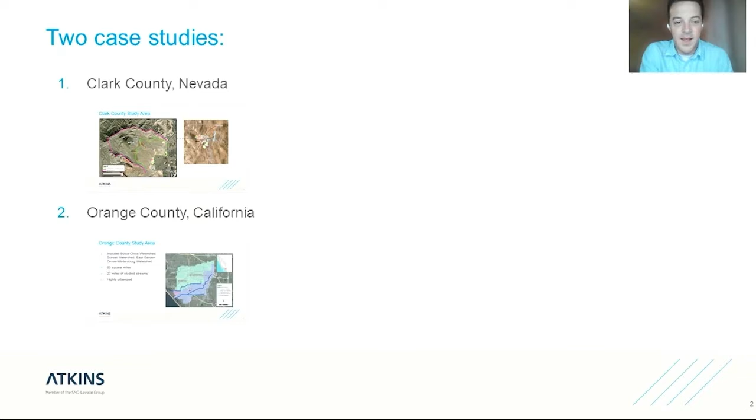Hello, my name is Clark Barlow. I'm a senior engineer with Atkins, and I'm excited to be here presenting at the virtual ASFPM conference. I'm here to talk about adapting 1D hydrologic methods for 2D model applications. And I'll be discussing this topic in the context of two case studies, one in Clark County, Nevada, and the other in Orange County, California. So starting with the Clark County, Nevada case study.

Clark County, Nevada, if you're not familiar with Clark County, is in southern Nevada. It's where Las Vegas is located. And the study area for this case study is on the west side of the valley. It's actually within the city of Las Vegas. It's an area that's growing quite a bit. It's in Summerlin, and this particular development is referred to as Summerlin West. It's a 7.2 square mile development denoted here by the green boundary. And the entire watershed area that encompasses and impacts this development boundary is 21 square miles.

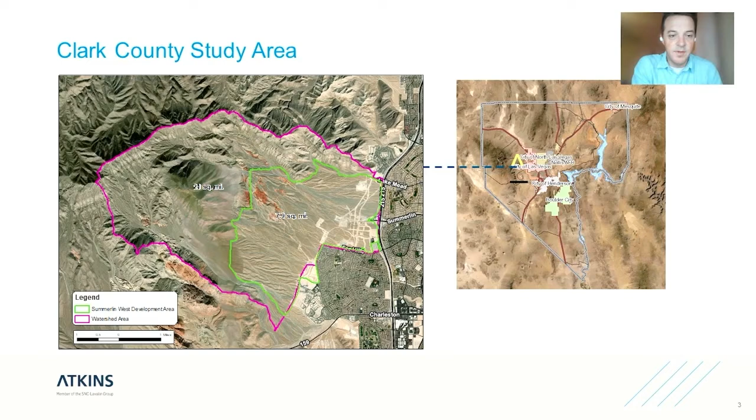The watershed is characterized by steep terrain. It's very alluvial, and it's very picturesque. And so there's a lot of interest and desire to develop this area. However, there's no flood control and no flood protection at the moment. And so that was the impetus for this study, to better understand the complex flow patterns in this area.

Specifically, we wanted to establish the 100-year existing condition flow rates and velocities so that as proposed flood control designs were developed, they could be compared against the existing condition flow rates and velocities to make sure there were no adverse impacts in comparison to what was there previously.

Our approach to analyze this problem was to use HEC-RAS 2D as the modeling engine. We used variable cell sizes ranging from 20-foot cell sizes where we needed a lot of detail up to 100-foot cell sizes where not as much detail was needed. We used a rain on grid approach. And what that allowed us to do is let the model figure out where the drainage paths should go. If you look at the blue flow patterns, you can see that flow sometimes splits and then comes back together. And so we felt like it would be better to let the model figure that out instead of us trying to delineate manually where the basin boundaries should be.

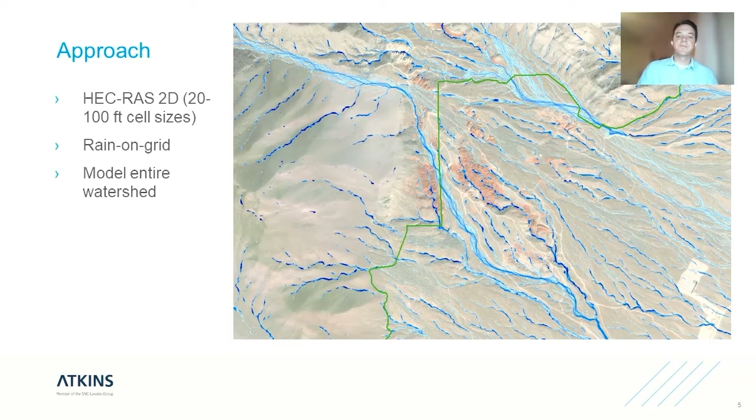As we started this process, we encountered several challenges, particularly as we tried to follow the drainage design manual within Clark County in the context of these more advanced two-dimensional models. And there were three areas that we ran into challenges and came up with what we felt like were good solutions. The first is in regards to the rainfall depths.

As you can see, the blue lines are isohyetal lines, which are areas of uniform rainfall depths. On the east side, you see depths of 3.4 inches, and on the west side, you see depths of approximately 4 inches. Not a huge range, obviously, but when you get about 4 inches of rain over the entire year, that 0.6 inches can make a big difference. And so we wanted to have some way to be able to capture that variation in rainfall.

Infiltration was another consideration, particularly as we were looking at doing the rain on grid approach. HEC-RAS, at least the version we were using, didn't have the ability to model infiltration. And so we had to come up with a way to quantify that. And then depth area reduction factors, which is a way to adjust rainfall depths based on the upstream area, was something we had to consider, something that's done commonly within Clark County, but is a hard concept to apply when trying to fit that within a 2D model framework.

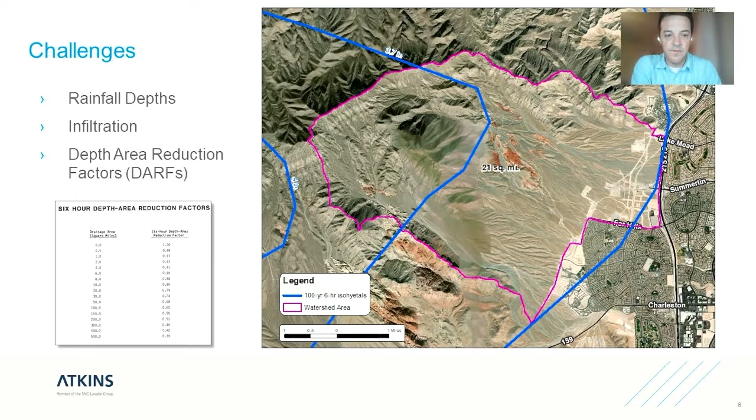So first, looking at the rainfall depths, the limitation we ran into is that HEC-RAS only lets you specify one rainfall depth for each 2D area, and so the only way that we could introduce a varied rainfall depth was to break up the domain into multiple 2D areas. And so you can see we broke it up into 4 different sub areas. And then within each of those 4 2D domains, we were able to specify a different rainfall value.

And so it gave us a little bit more control over how much rainfall to put in different parts of the watershed. So for instance, in the area that was 1.7 square miles, the rainfall depth was closer to the 3.4 inches. Whereas in the area that was 5.9 square miles over on the west side, the rainfall depth was closer to the 3.7 and 4 inch range.

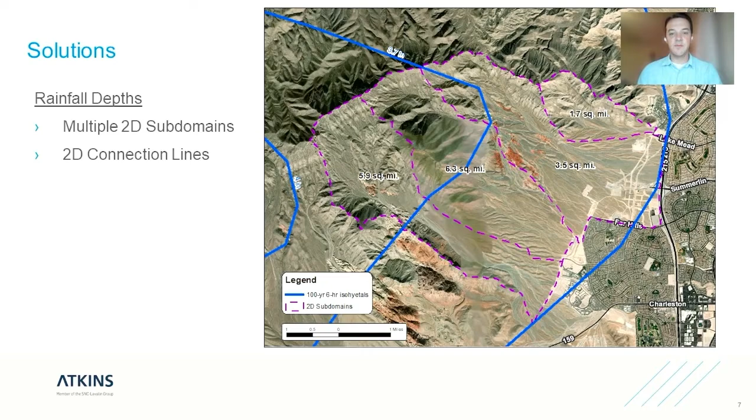And so then we were able to connect those 2D areas using 2D connection lines, which basically act as weirs that follow just the ground profile. And then that would control the exchange of flow between the 2D areas. And so we were quite pleased with that approach, and it seemed to work very well.

As far as infiltration, again, as I mentioned, HEC-RAS, at least in the version we were using, didn't have the ability to model infiltration. However, that's an important part of the hydrologic analysis. And so what we elected to do was use HEC-HMS to compute the rainfall losses.

And then we took the rainfall excess amounts from HEC-HMS and used those values as the direct rainfall input into the HEC-RAS model. And so we were happy with that approach. It gave us a level of comfort that we were accounting for losses, and then applying the rainfall excess as an adjusted sort of rainfall depth that had already accounted for the infiltration.

The depth area reduction factors was another challenge, and essentially depth area reduction factors allow you to look at the total upstream area and then use an adjustment factor to reduce the rainfall, to account for the fact that the storm isn't going to fall uniformly over the entire large watershed. And then as you look at smaller watersheds, the impact of that adjustment becomes less and less. That was a difficult concept to think about and apply in a 2D model.

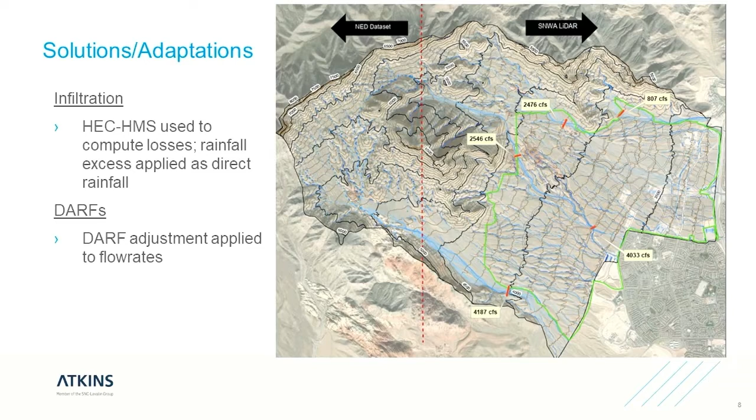And the reason for that is because at any given point within the model, you're going to have a different upstream area. And so, take the point there at the top right where it shows 807 CFS. What we would do then is inspect the upstream area at that point, figure out what the corresponding DARF value is, and then apply that DARF adjustment on the flow rate.

And so we were pleased with that approach. And in fact, as we compared the results of this modeling effort with a 1D model that covered at least a portion of this watershed, we found that the results were actually quite comparable within the 10, 15, 20% range. Now, a lot of that variation is because of the fact that 2D models are inherently different than 1D lumped parameter models, and so you would expect that kind of difference anyway. And so the fact that we were able to make some simplifying assumptions and still be within a reasonable range gave us some good confidence in the approach we used.

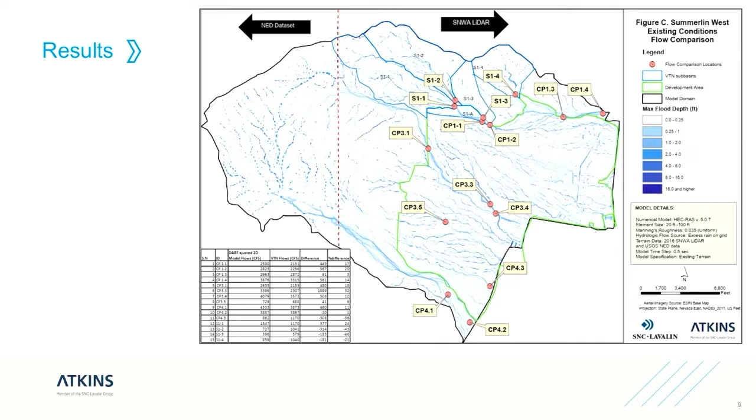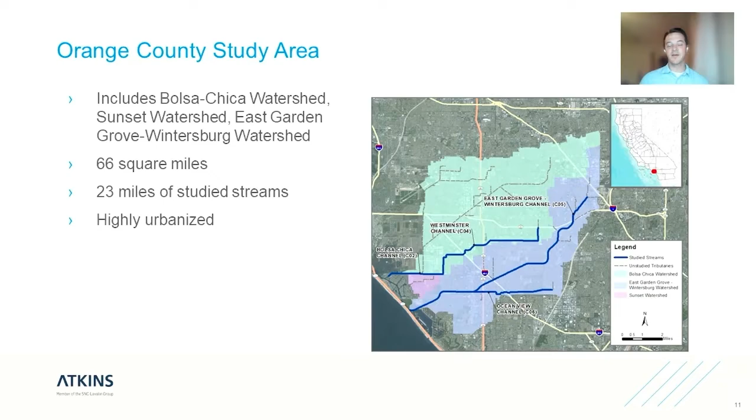The total watershed area is 66 square miles, and it includes 23 miles of studied streams. It's a very urban area, highly urbanized, very different from the watershed that we just looked at in Clark County. And so it came with a lot of its own challenges. In fact, it probably deserves its own presentation and probably will at some point.

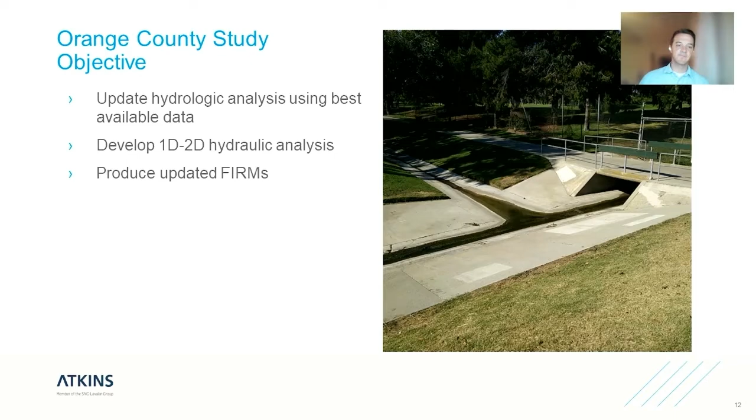The objective of the study was to carry out an updated hydrologic analysis using the best available data, and then to develop a 1D/2D hydraulic analysis that used the hydrograph output from the hydrologic analysis as input into the hydraulic analysis. And then the floodplains that were generated from the hydraulic analysis would then be used to produce updated flood maps for insurance purposes. And that's still an ongoing effort.

The hydraulic model was built using HEC-RAS. It was a combined 1D/2D unsteady model. The 1D domain was connected to the 2D domain by using lateral weirs, and the 2D domain was comprised of 50-foot cells, which still resulted in a fairly large and sizable model. The inflow hydrographs were applied in the 1D domain using the inflow hydrographs from the hydrologic analysis, which for this study followed the Orange County unit hydrograph method that's prescribed in the Orange County Hydrology Manual from 1986.

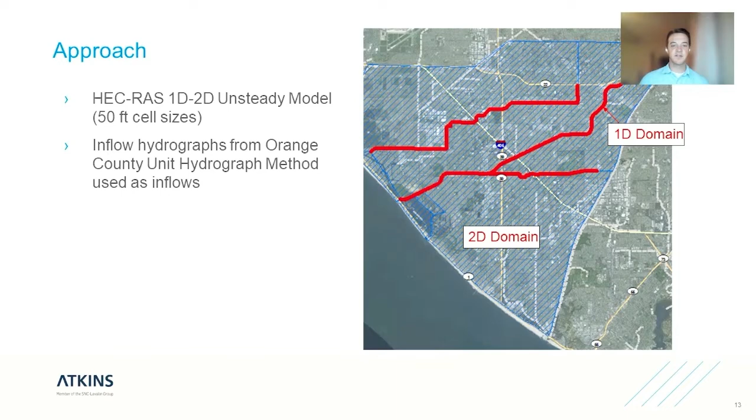And so the fact that we were using the hydrologic methods from 1986 to try to apply that to this complex 1D/2D unsteady model became quite challenging. And there were two areas I want to point out where we ran into some specific challenges. The first was, again, in the application of the depth area reduction factors, and the second was in the application of the lag time and time of concentration calculations, which are fairly unique within Orange County. So first, the DARFs.

DARF values are typically applied, like we talked about, for a single catchment area based on that drainage area. So you look at the drainage area and figure out which DARF value corresponds to that. Now the Orange County Manual states that that catchment area is the total drainage area contributing runoff to the point of concentration where the design discharge is to be calculated. Now that became quite challenging to apply in our case because there wasn't just one design discharge that we were interested in, but we were interested in multiple discharges as you move downstream in the channel.

And so if you used one depth area reduction factor for one concentration point, when you move down to the next concentration point, you may have enough area now at that point where you should be in a different DARF. However, you had a concentration point upstream that you needed a different DARF for. And so in order to apply that criteria strictly, we really would have needed separate models for each DARF that corresponded to the upstream area of each concentration point.

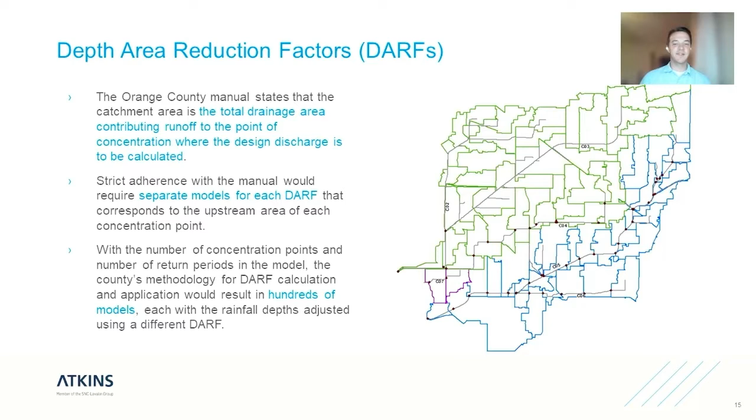And that the prospect of doing that was just crazy, to be frank. And so we brought that up with Orange County and came up with a simplified method that was more practical for the purpose of our study. And so that simplification is outlined here.

Essentially, the upstream area for each concentration point was evaluated, and a corresponding DARF value was then applied to the rainfall values, not for that entire watershed, but for additional sub areas that came in between that concentration point and the next upstream concentration point. Now, although that resulted in an over prediction of flow rates at the concentration point, the hydrographs from individual subbasins coming in were more accurate.

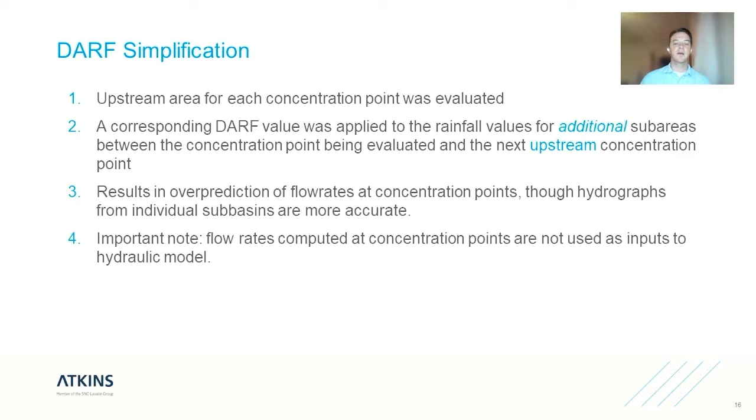And really, it was the hydrographs from those individual subbasins that we cared about the most, because it was those hydrographs that were going to be used as inputs into the hydraulic model. We weren't interested in using the hydrographs at the concentration points because the 2D model already has flow coming into it from upstream areas. Now, like I said, the flow rates computed at concentration points weren't used as inputs into the hydraulic model, so it wasn't as important that those concentration point flow rates may be a little bit overestimated.

Now, as far as the lag time and time of concentration goes, the Orange County Hydrology Manual, again, from 1986, actually requires a separate rational method analysis be completed to develop time of concentrations for unit hydrograph studies. In other words, if you have a single watershed that you're running within HEC-1, you need a separate parallel model of that same watershed using the rational method to come up with the time of concentration that you can then transfer into that unit hydrograph or that HEC-1 model.

Now, for one watershed, that's not such a big deal. But when you're looking at 50, 60, 70 sub-watersheds, and now 50, 60, 70 separate rational method models, then it becomes a big deal. Specific instructions for how to do this weren't really written into the manual just because that application wasn't very common back when the manual was written. So we sort of had to think about this and come up with an approach that we felt would be appropriate.

Now, if you think about the rational method analysis, at least in the Orange County manual, it requires a couple of things. It requires the delineation of an initial sub area, which is really small because that initial time of concentration is so slow. That time is very critical to the overall time of concentration in the watershed. And then each subsequent sub area size is supposed to be no greater than 4 times the area of that smallest sub area. So now you're not only looking at a parallel rational method model, but potentially one that's subdivided over and over and over again, to comply with that criteria.

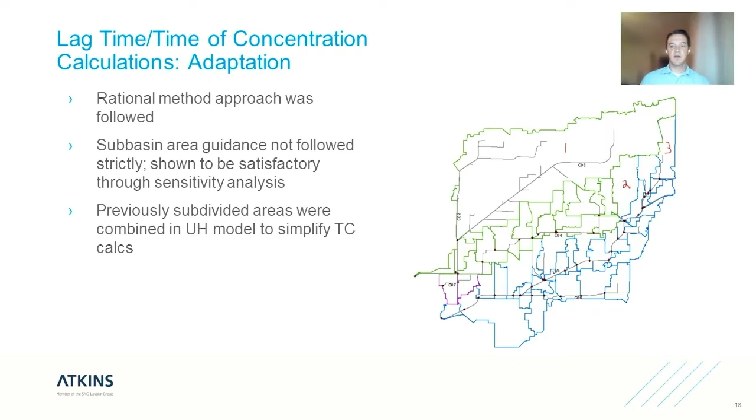In fact, if you look at the results from the study in comparison to a previous study done, as well as the FEMA effective flow rates, even when comparing the concentration points, which we felt were over predicted, we were still very close to those previous studies.

A couple of lessons we learned through this process are that many hydrologic criteria manuals, particularly ones that haven't been updated in some time, just are not well suited for unsteady hydraulic model applications, let alone 2D modeling. Just the unsteady concept is something that requires some adaptations of that criteria to be able to use it.

Another lesson we learned is that there really is a need, I think, to standardize some of these inputs: rainfall, DARFs, how to handle infiltration, time of concentrations, and lag time for these 2D unsteady applications. And that's only going to become more important as 2D models become more widely used and accepted.

And then a third lesson we learned is that it's just key and extremely critical to have an upfront discussion with the project team, both the consultant and the client, regarding the modeling approach and what simplifying assumptions are going to be used, just so that everybody's on the same page and you have buy-in from the very beginning. And that requires both an understanding of the 2D models and how they work, as well as an understanding of the criteria that's being applied.

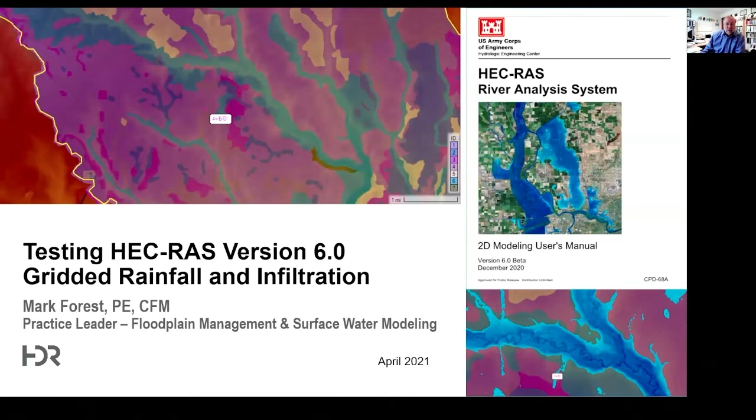Today I'm going to talk about testing the beta version of HEC-RAS 6.0 for the gridded rainfall and infiltration functions on 2 watersheds in the Houston area in response to Hurricane Harvey. First of all, it's important to put in context how these new features differ from what's in RAS currently. You can do rainfall runoff modeling in RAS 5.07, but you're limited to the assumption of a homogeneous rainfall excess over your entire domain, requiring that you break up your model into multiple interconnected domains in order to treat any kind of non-homogeneity. So it's a bit awkward to do the level of sophistication you can do in the new version.

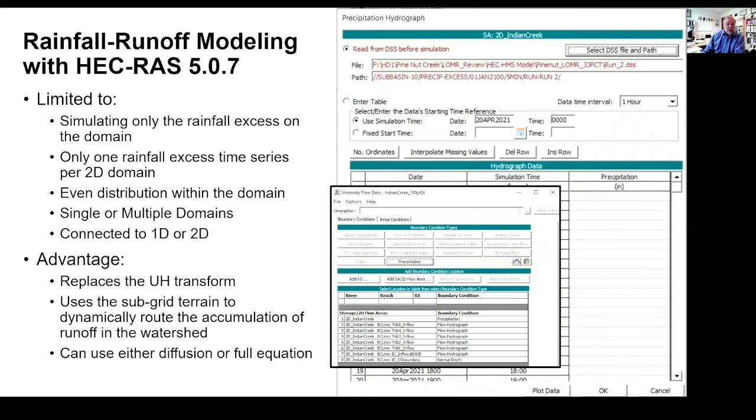What the rainfall runoff simulation in RAS does is replace the unit hydrograph transformation, which assumes a much more lumped parameter approach to determining how the runoff accumulates within your watershed to the point of interest. The simulation can be done with either the diffusion or the full momentum solution. 5.07 validates quite well against HMS. This has been tested by HEC. We tested it on a number of watersheds.

One example is this one from Rincon, New Mexico, where this watershed was simulated using HMS originally. The rainfall excess from HMS was applied to a 2-dimensional grid within RAS to see how well it would replicate what HMS produced. And so the volume is going to be identical, as you can see in the comparison hydrographs, because it's using the same rainfall excess. So by definition, it's the same volume of runoff.

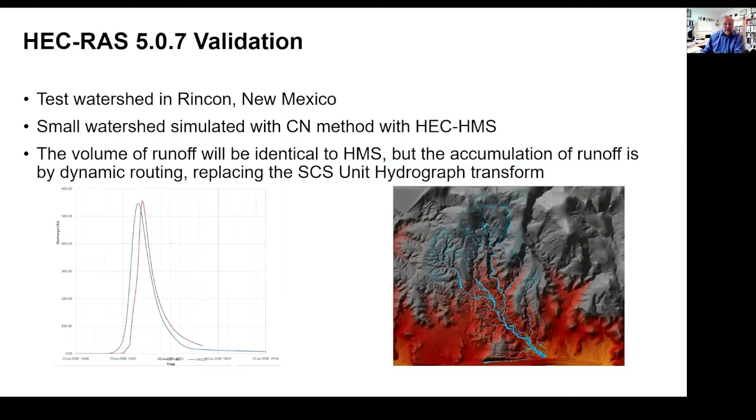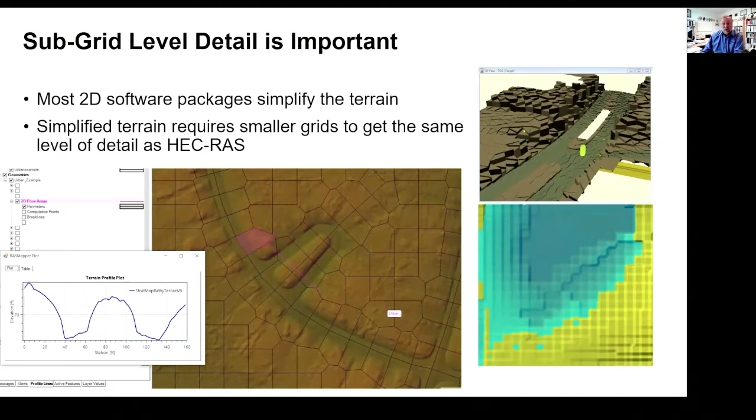The difference being the replacement of the transform with a very dynamic simulation of the rainfall from all portions of the watershed accumulating in the main channel to the point of interest. The peak was very similar, and the time of peak was only slightly offset, so they compared very well to one another. And it's able to do that because RAS sees that subgrid level of detail, whereas most 2D models simplify the terrain as a single elevation for each grid element, represented as a triangle or a rectangle or a square, as opposed to being able to see the subgrid terrain detail that RAS does.

So if you imagine that this is a grid cell within your model, RAS cuts a cross section at each cell face. You can see that when flow enters at this cell face, it only has an opportunity to leave this cell face at very low flows. It has to get deep enough to interface with the two sides before there's going to be interaction between this cell and the adjoining cells on either side. So that allows it to see a preferential flow path through your domain. That's really important to doing rainfall runoff modeling and being able to capture those unique hydrodynamics of how flow is propagating through the watershed.

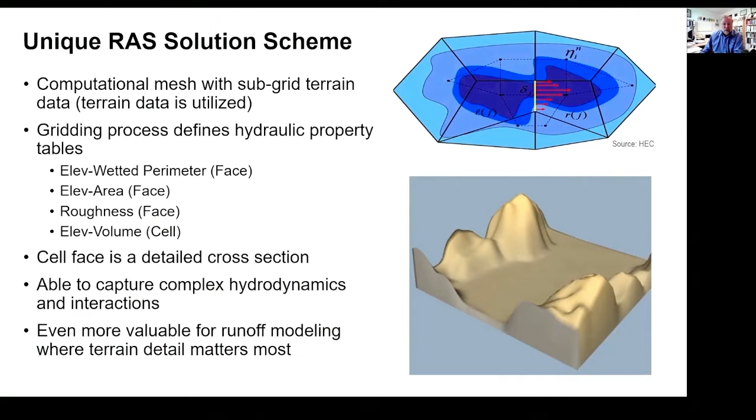So beta 3 of version 6 of RAS adds a couple of new features that are really key to this process. One is gridded rainfall. Being able to identify the time series rainfall that's occurring at every grid cell within your watershed allows you to simulate the behavior of a storm that's moving across your watershed or down your watershed, which would obviously change where that rainfall excess is occurring and then how it ultimately propagates through your watershed.

The other is spatially variable infiltration. So with that rainfall that's occurring here, it's falling on different types of surfaces that have different runoff characteristics. Being able to capture that at the locally specific level combines that locally specific rainfall to a very locally specific runoff computation, and then allowing that two-dimensional solution to then accumulate that runoff within your watershed to your point of interest.

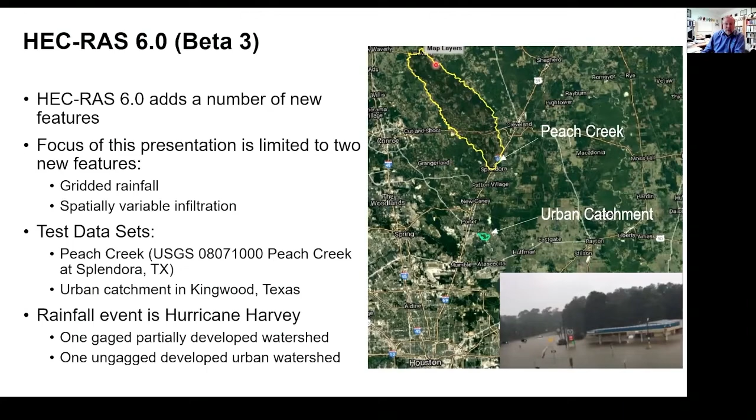So our two test data sets that we applied to this test, it's a limited test of some of the features. One is a gauged watershed, which is Peach Creek at Splendora, which is this one. And the other is an urban catchment that's fully urbanized and ungauged. Hurricane Harvey produced very substantial amounts of rainfall over the Houston area. In our larger watershed in Peach Creek, 22 inches approximately during the course of that event, as compared to almost 28 inches in our urban catchment.

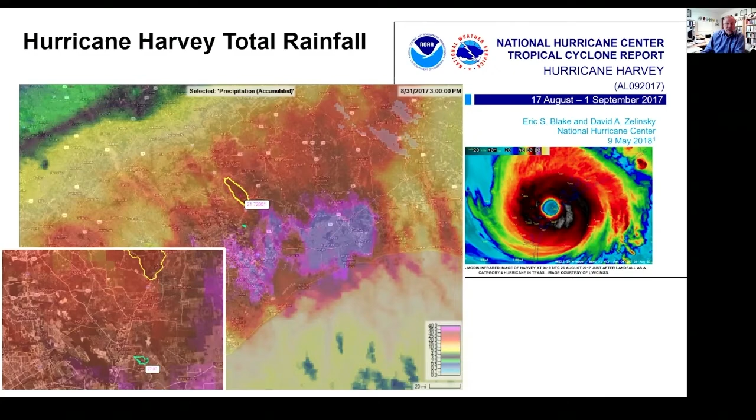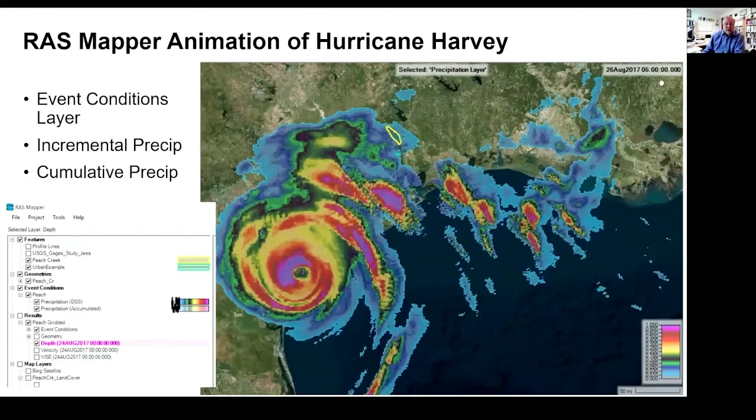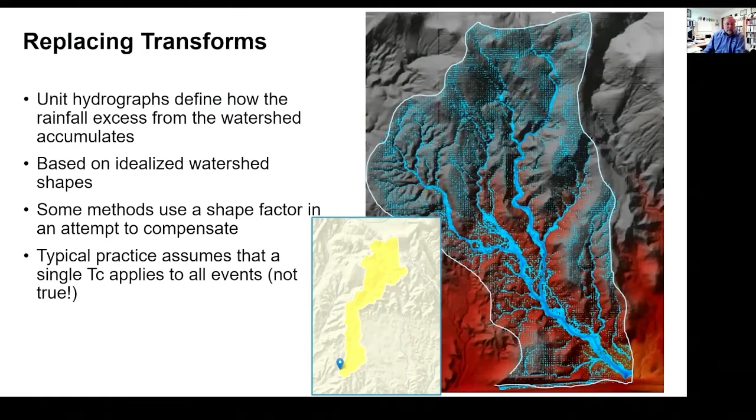A lot of times also people assume that the same time of concentration will apply to all the events that they're going to simulate within that watershed, a 10-year event and a 100-year event having the same time of concentration. But that's not true, because a very frequent event is going to produce lower depths and velocities within these channels, and therefore a longer time of concentration than an extreme event that produces greater depths, greater velocities, and shorter times of concentration. So by simulating it dynamically, you'll automatically account for those differences from rainfall event to rainfall event, as opposed to having to modify your time of concentration.

Runoff accumulation is going to be much better defined, obviously, with an overland flow model, since it's able to capture a lot of those very unique watershed conditions that exist. The surface for overland flow is going to vary depending on the characteristics of that surface, where the defined channels are and what their conditions and roughness are, the storage that's taking place within the watershed, and whether flow is behind impoundments or roadway embankments, which will affect how flow propagates through the system. And if you've got conveyance systems within your watershed, that may also influence how water accumulates and propagates.

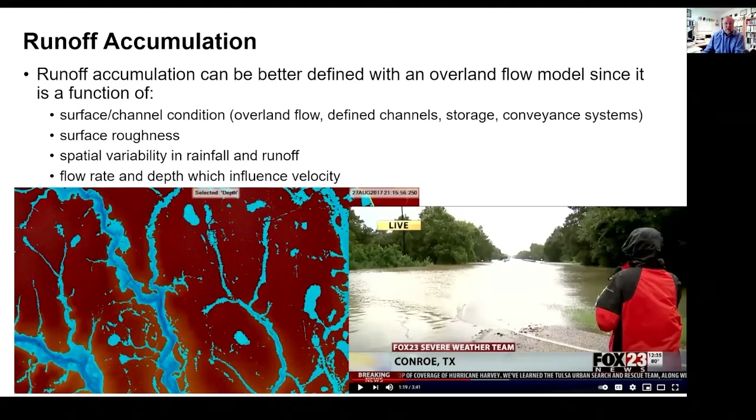The roughness of those surfaces is obviously key, and the spatial variability of that roughness, as well as the rainfall and runoff, all influence the velocity that leads to the time of travel to your point of interest. Rain on grid considerations include properly characterizing the surfaces you're dealing with, as well as the complex factors that affect the rainfall losses that get you to an excess. For example, interception by the plant canopy is uniquely different when you have sagebrush or turf or very dense trees. They all have their own unique interception characteristics, depression storage, surface wetting and infiltration that's spatially variable with soil type and soil profile.

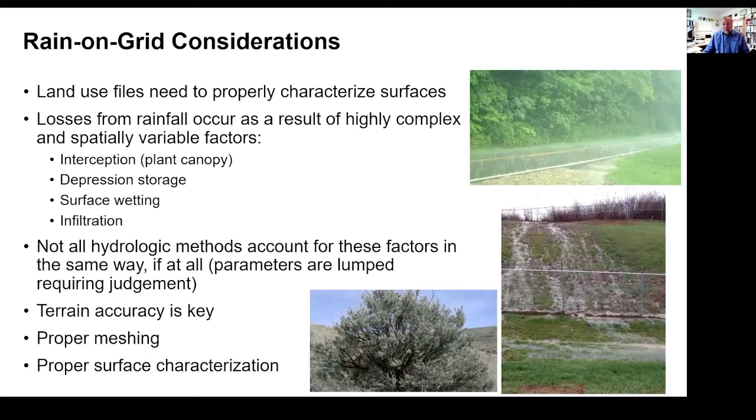Not all hydrologic methods can account for all these factors in the same way, if at all. And oftentimes the parameters are lumped, which requires you to exercise some judgment about how you pick the range of possible parameters without the ability to separate out these various factors by themselves. Terrain accuracy is obviously very key. Proper meshing and characterization of your surface is going to be key. So of the potential sources of error when you're doing this type of simulation, the rainfall is going to be one of your biggest, and usually is in a hydrologic model.

When you don't fit the observed data, you should look at the rainfall first, because it's usually your culprit, your largest culprit. Make sure that rainfall also has been adjusted to your local time, because NOAA publishes their data for Greenwich Mean Time. So when you're comparing to observed data, that adjustment has to have been made first, or you're going to mismatch depending on where you are.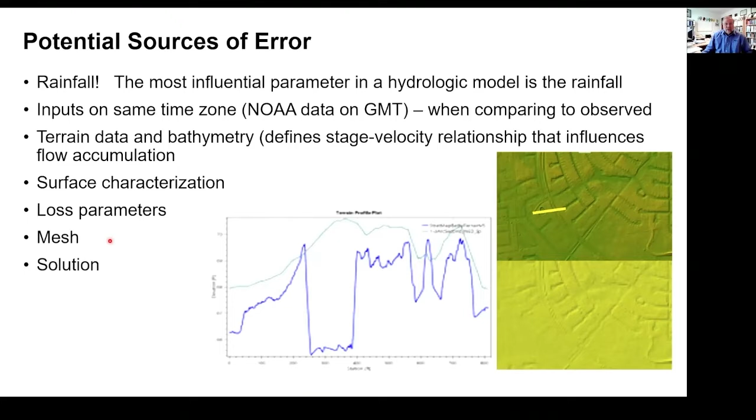The terrain data and bathymetry really defines that stage velocity relationship that influences flow accumulation. So if your surface is not properly represented in the terrain data, you're not going to accumulate the same way. This is an example of the same location, this one being a LIDAR data set, this one being a 1/3 arcsecond data set, and a cross-section cut through the same location within those two data sets looks like this. Clearly, this is not going to behave the same way as this one does. So characterization of the surface, and we talked about those, as well as the solution scheme you use may have a difference in the outcomes.

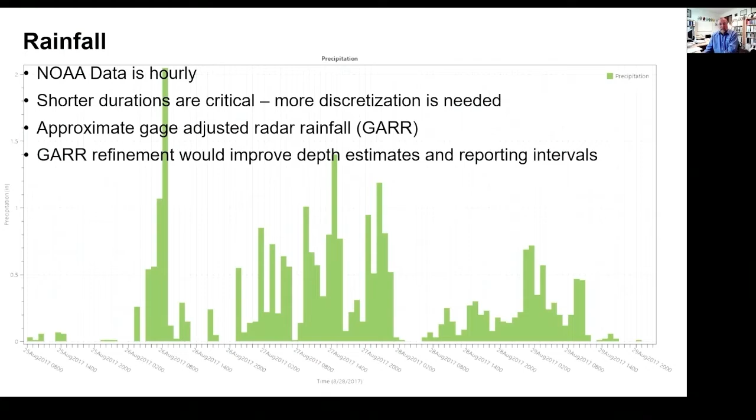The rainfall is really key to the behavior, and in this case, we're using an hourly data set, which is too coarse. During an event like Harvey, there were very intense bursts of rainfall that occurred at the sub-hour level. And by averaging the values at the hourly level, you're not capturing those shorter duration, intense bursts within that rainfall event that could be critical to the peak discharges, especially in a smaller watershed. So adjusting that gauge adjusted radar rainfall data set, using adjustment techniques and ground truthing techniques to get better discretization would improve the results.

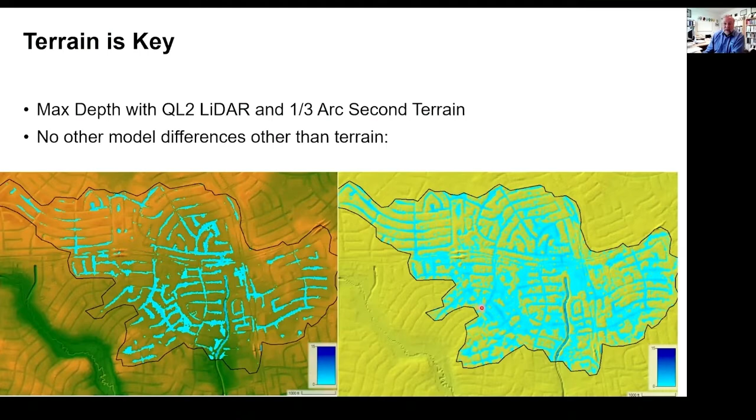And what you see there is obviously a very different outcome in terms of flooding extents between these two simulations, which also produces a different outcome in terms of peak discharge at points within the model, where the upper line is the coarser terrain data set and the blue line is the more refined data set. So takeaway there is terrain data set makes a huge difference in your outcomes when you're looking at those kinds of differences in inundation and peak.

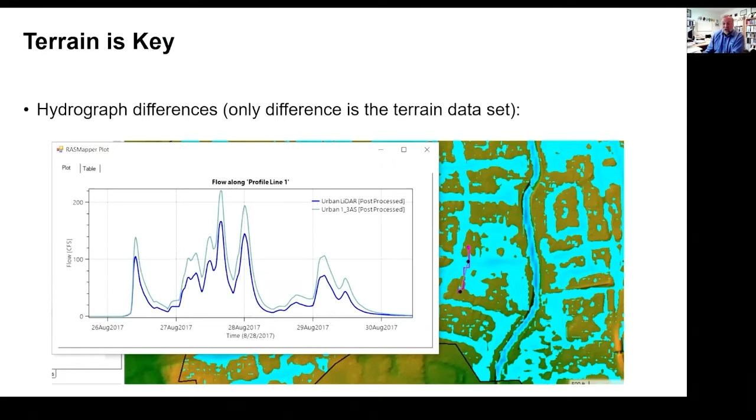So what HEC did was modify the curve number method to allow for initial abstraction makeup, and the user can define the period of no rainfall that would allow the initial abstraction to return and be applied again, and also allows the use of a constant infiltration rate at the tail end of your simulation, where the infiltration rate becomes constant or asymptotic. You can apply that constant infiltration rate at the tail end, and that's a flaw in the current curve number method, because the losses become zero after a certain point, which the traditional curve number method is only applicable to the 24-hour duration that it was developed for and can't be applied beyond 24 hours.

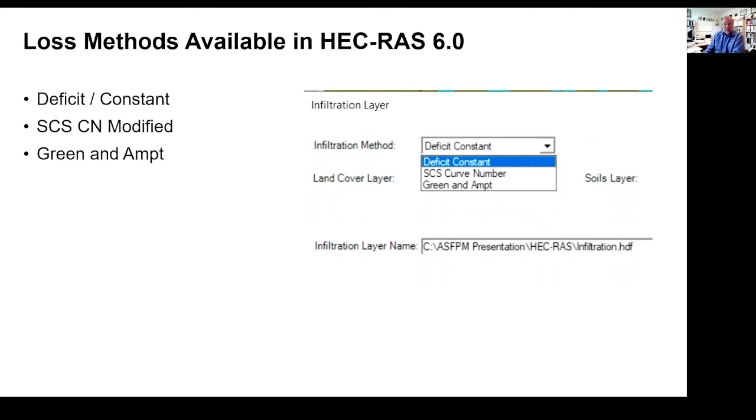These modifications allow you to be able to do that, use the curve number method for longer than 24-hour periods, which is worthy of additional testing. But as you'll see, our results are not bad at all for an event that's actually 5 to 6 days long. Green and Ampt describes the infiltration curve a little more explicitly. I didn't test it in this particular instance, but that would also apply to longer duration events.

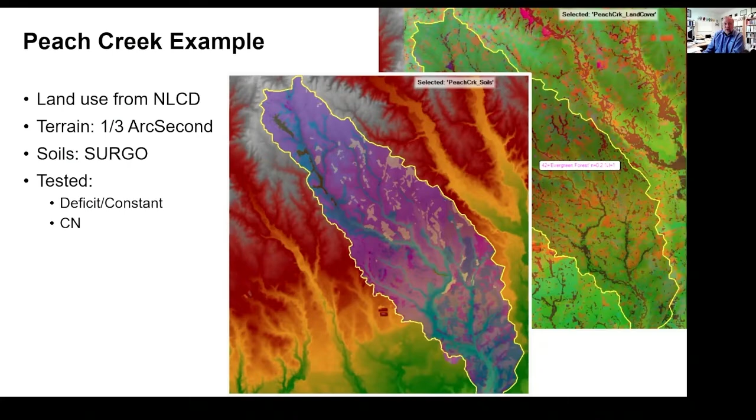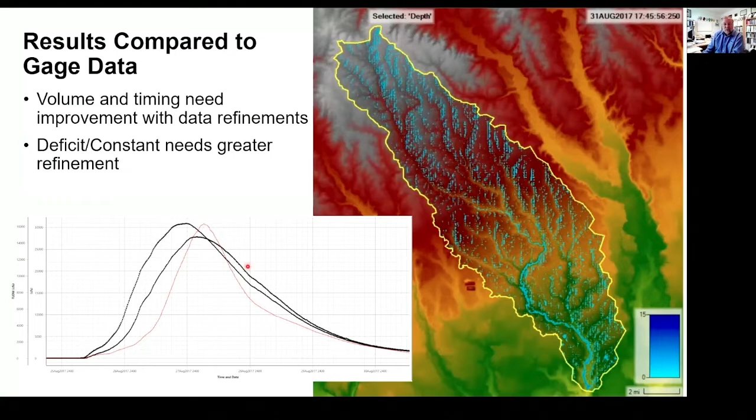So without any kind of modification, just reasonable estimates, inputs were coming close, which means that we could get a better fit with adjustments. What would those adjustments be? They'd be a refined GARR that gives us that sub-hour detail and probably improved results for depths, better terrain data,

better land use classifications. The curve number method needs to consider minor soils, not just the dominant soils. Verification of vegetation type and cover density from a better land use data set other than the NLCD. The curve number needs to be refined based on soils and cover. And in some cases, you also need to make sure your target is good. Assuming that USGS published hydrograph is accurate can be incorrect in many cases. We know in this case this hydrograph has been validated, but you should always assume that there's a potential source of error there as well.

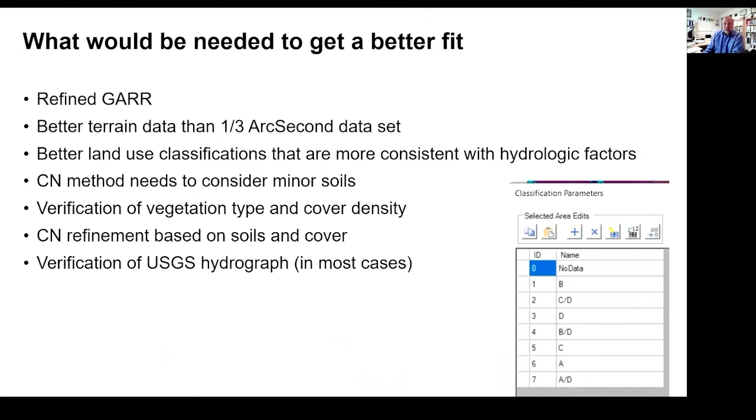So in conclusion, what we found is that the revised curve number method really has great promise for overcoming traditional limitations to this method to the 24-hour duration. That initial abstraction makeup and the steady state infiltration rate really are nice adjustments to that methodology that give me a lot more confidence that you can apply it to longer duration events.

Spatially specific losses and rainfall vastly reduce lumping of parameters, particularly a moving storm across your watershed, or that spatial variability that's lumped into the whole watershed is a really gross oversimplification when there's non-homogeneity. This allows you to actually capture that non-homogeneity at a very spatially specific scale. The tools are very versatile for doing sensitivity testing and refinements. You can modify the tabular values really easily to capture your error bands.

The overland routing is vastly superior to the unit hydrographs, and that subgrid terrain detail really lends itself well to doing overland routing accurately. The quality of the inputs is key to the outcomes. So making sure that all of those inputs are good will improve your results for sure.

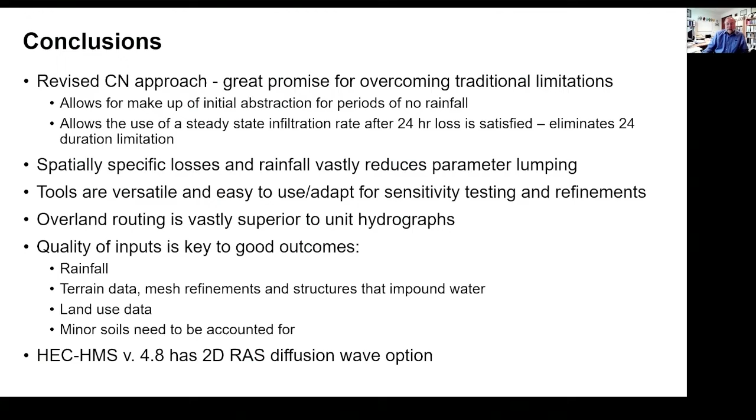The first one is from Hayden, who asks, are there any good tools or resources you used to develop the gridded precipitation input and associated timing?

Can you hear me now?

Yeah. Okay. So that question seems to be related to my particular test, which was an observed event, Hurricane Harvey. There are some other questions I see regarding hypothetical events as well. In our case, we used two sources of information for testing. One was the NOAA data, which is a gridded data set that already has the information at a 1 kilometer interval and at a 1 hour time increment. There are other tools out there for adapting data sets like HEC-MetVue, which will allow you to also incorporate hypothetical events.

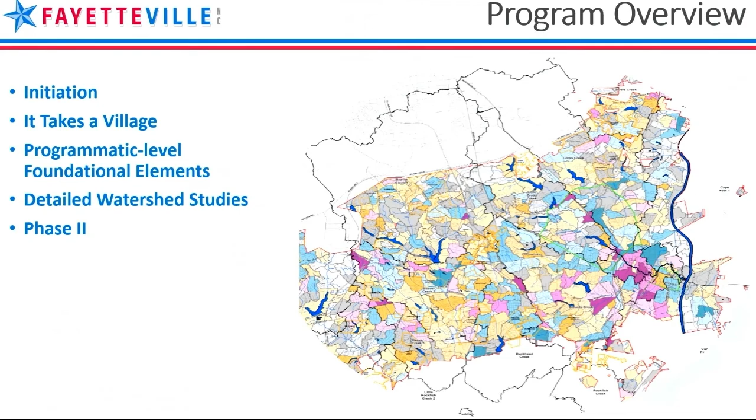Ranking of concern areas is where we're at now, and the ranking is based on the severity of the problem, and I'll talk a little bit more about that towards the end. But in phase 2, then we'll be evaluating potential projects. So we're moving into phase 2 pretty quickly here, or have moved already with some watersheds. So with that, I'll turn it over to Ed to discuss their role in the program and the rain-on-mesh modeling that helped identify and prioritize our study areas.

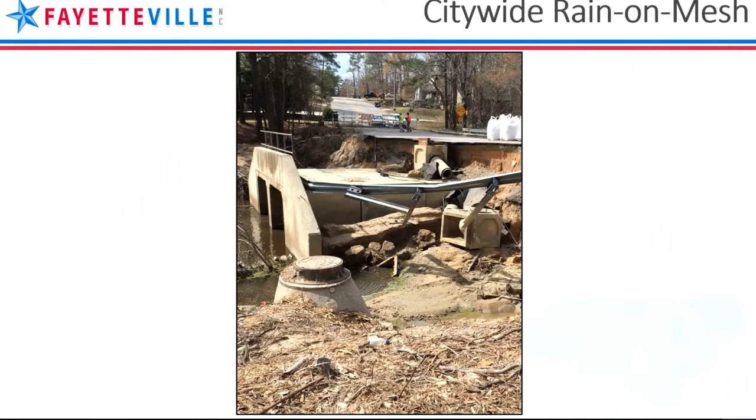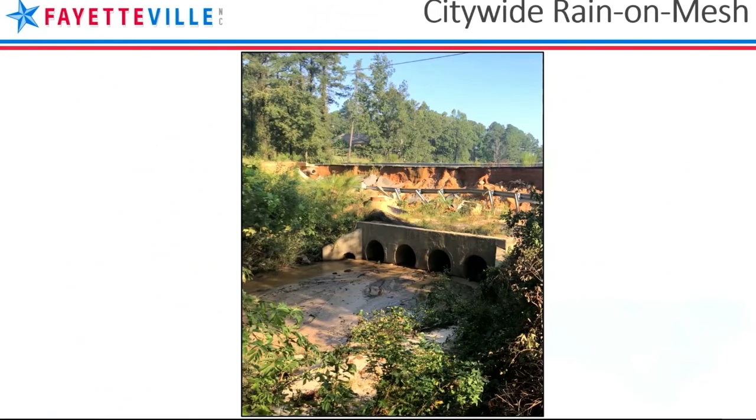Thank you, Alicia, and good afternoon, all. A key step in any watershed master plan program is to identify and quantify flood risk. This discussion will focus on how Fayetteville performed that step. The city needed a way to objectively and systematically identify flood risk citywide to focus limited resources in high-risk flood areas. This was a large study area, greater than 150 square miles, and the cost to model the entire city in detail was just not feasible.

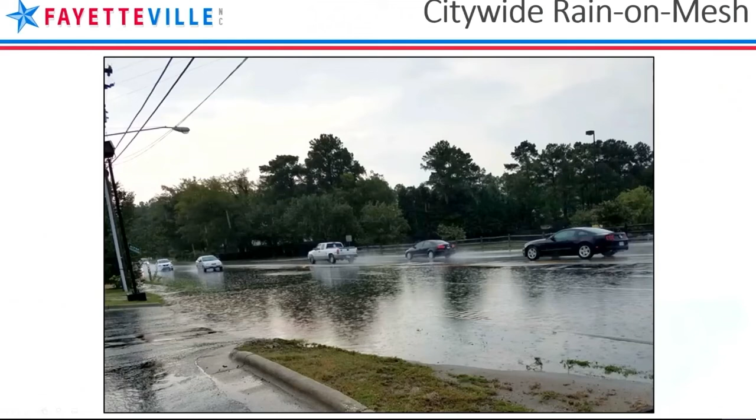Also, we could not just focus on the large storm event riverine issues. We need to understand the more frequent urban flood, standing water, summer thunderstorm issues. A comprehensive, efficient, planning level flood assessment tool was needed. The tool needed to handle storm drains and complex surface flow patterns, spatially varied rainfall, all on a 2D platform.

Therefore, an ICM rain-on-mesh approach was identified because it could efficiently assess a complex combination of storm drain systems, surface flow patterns, spatially varied rainfall, and spatially varied hydrologic losses over that 2D surface. And it could closely simulate observed events.

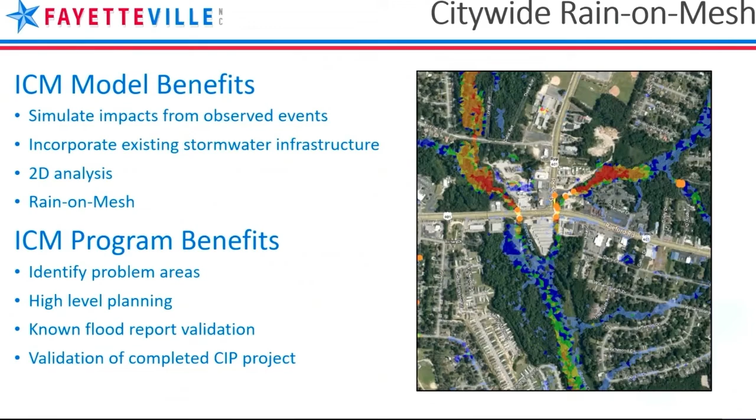It could incorporate the existing infrastructure, the pipes and nodes. And the spatially varied rainfall analysis available within ICM is beneficial because it allows the model to be validated accurately for both historic and hypothetical storms.

The data sources used for this analysis included the city's existing infrastructure files database, and we used mainly the main storm drain pipes 36 inches and larger, and culverts that were 24 inches and larger were included in the model. Now, this data was a little bit limited in that the vertical aspect of this information was not readily available. The terrain data set was the QL2 LiDAR from NC OneMap. It was a 5x5 foot DEM.

Rainfall depths were taken from Atlas 14 for the hypothetical events, the 10, 25, and 100 year. And for the actual events, for the hurricanes, the National Weather Service Stage 4 quantitative precipitation estimates were used. The land use files, the city had some existing land use files that we used within city limits, and this was supplemented outside of city limits where needed with NLCD data.

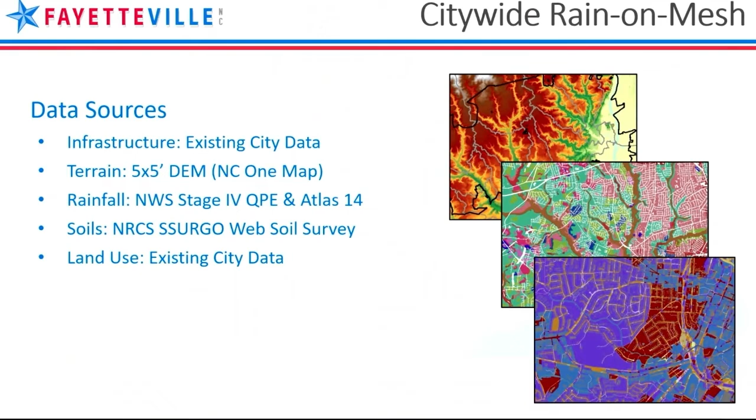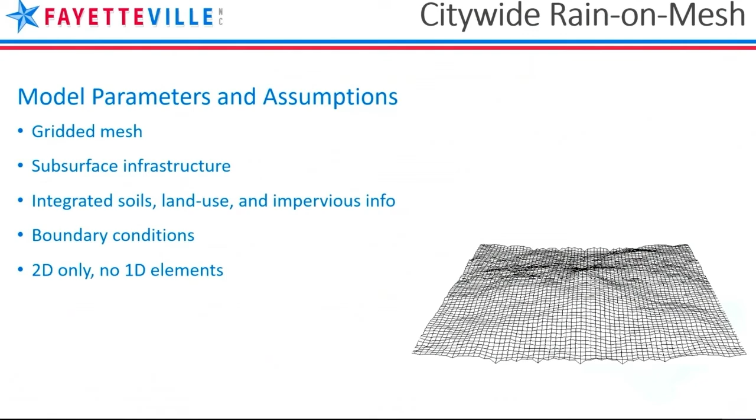Some of the model parameters and assumptions used. The model was built on a gridded mesh based on that LiDAR data set provided by the state. The gridded mesh itself, we can get into a little more detail, but the maximum triangle area, minimum element area, and maximum height variation parameters give ICM constraints for how to define the 2D unstructured mesh.

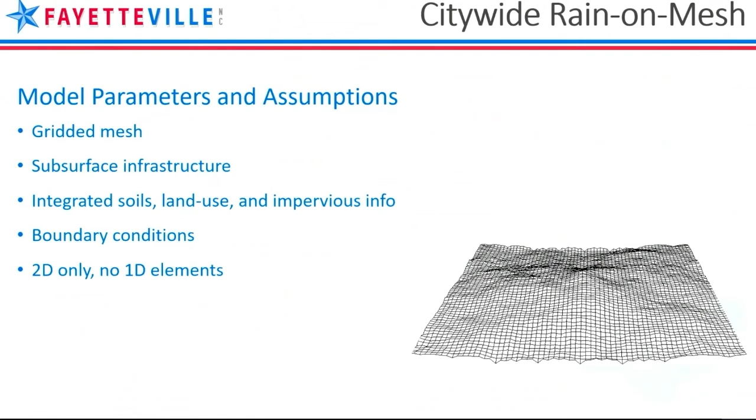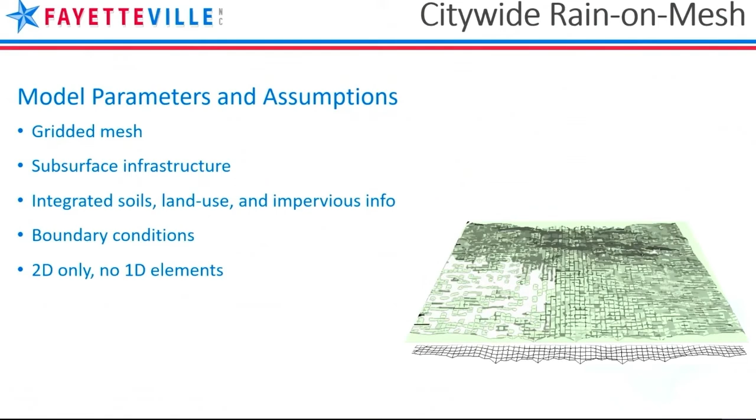That information is key, and the maximum triangle area used in this analysis was just over 2,100 square feet. The minimum element area was just under 1,100 square feet, and the maximum height variation within each element was set to 1 foot. And as previously mentioned, storm drain pipes 36 inches and greater, and culverts 24 inches and larger across the city were added. And then the soil and land use and impervious surface information was applied to the mesh to estimate runoff.

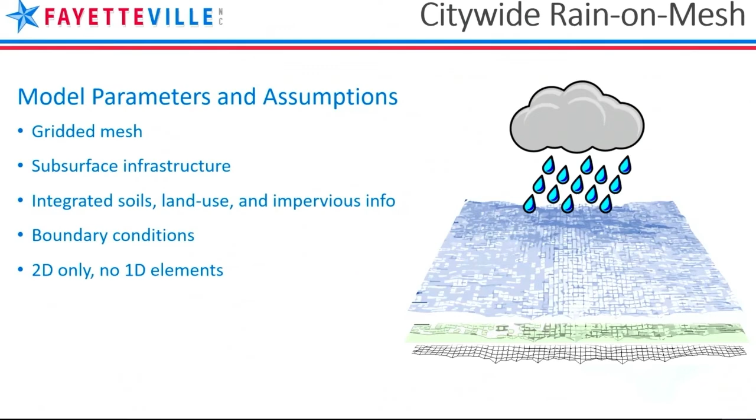The boundary conditions at the perimeter of the mesh were set to normal depth using an energy grade slope approximately equal to the ground slope. All channel and surface elements were modeled in 2D without 1D elements or bank lines.

Now, obviously, there's some model limitations to this because it is a planning level assessment, and it's citywide, so it's large scale. So we were concerned with the large size of the model itself. Therefore, we had to go with a little larger mesh size, which does allow for shorter computational times, but it does sacrifice some surface detail. But I think at this level, we were okay with that from a planning perspective.

Also, due to the lack of the comprehensive vertical elevation data set for the existing stormwater infrastructure, as I previously mentioned, the invert elevations for all the model assets were estimated based on a minimum cover assumption throughout the model area. Structures were imported into the ICM model as manholes, 2D node type with a flooding discharge coefficient of 0.5 and a 2D element area factor of 1. So that's how all the nodes were imported uniformly.

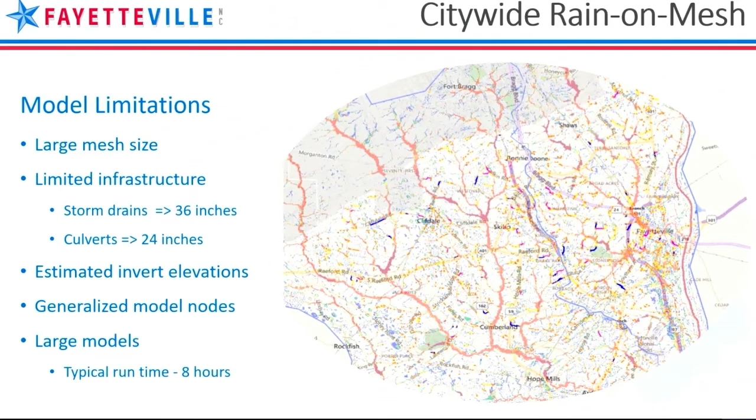When importing the storm drain system, the ICM head loss method at the upstream and downstream end of each pipe was set to normal with a coefficient of 1, which is the default value. These parameters provide a nominal amount of head loss appropriate for general application in the absence of site-specific information.

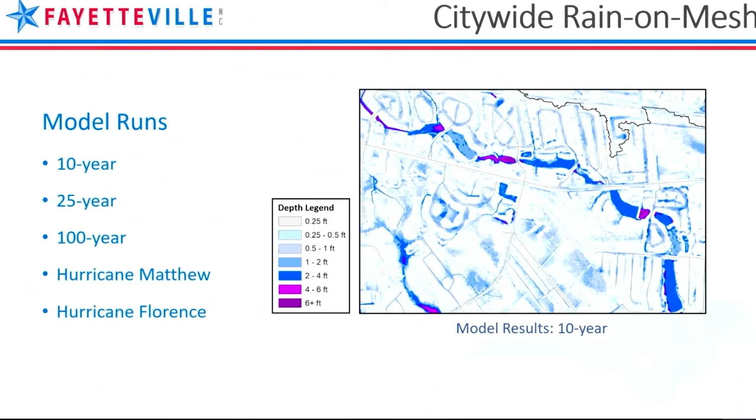So, for the model runs that were considered, we didn't want to run a bunch of storms through here because of the run times, and we just needed to focus in on the key design storms we needed to think about. The 10-year and 25-year are basically the city's design storms for different features. So we obviously had to run those to see what kind of level of service was estimated in some of these areas. And we added the 100-year as a top-end type of storm. Historical rainfall from Matthew and Florence were run for validation purposes.

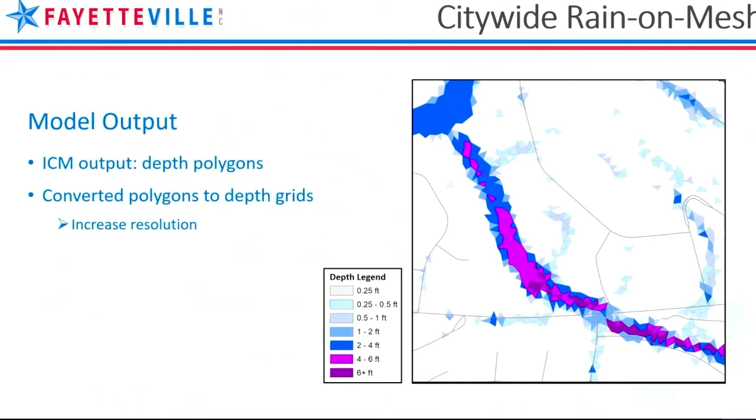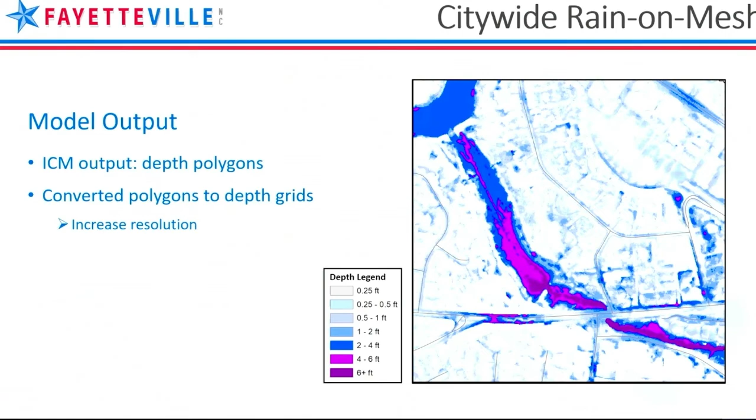Model output itself, ICM produces depth polygons. These depth polygons were converted to depth grids for ease of viewing. As you can see here, the depth polygons themselves are pretty jagged. Again, they're definitely more accurate, but in order to view these at a large scale, we wanted to be able to take a look at the grids themselves. So that increased resolution is necessary for the viewing.

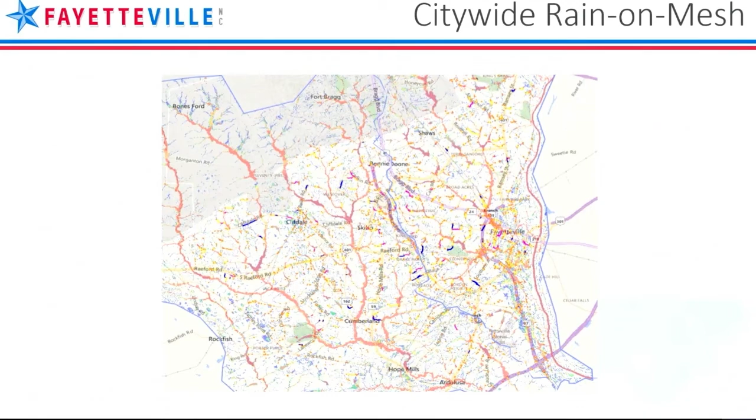Citywide, so that's how the model is built, basically. The citywide rain-on mesh model, just from this scale, looked like a big mess. But as you zoom in, you can start to see some of the resolution we had here when you run this. Nothing earth-shattering here, but you can see the low-lying areas start to fill up as the rain falls onto the surface. So it's accurately estimating floods as they run through the system.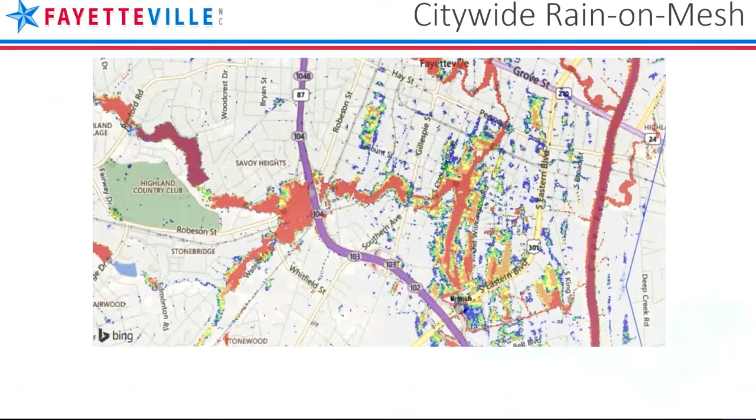So the model's built and run, and as efficient as we could make it. Again, the run times were about 8 hours. So these were not small models, but they had a lot of information in it, and we wanted to make sure it was validated information. So before significant decisions were made, the model needed to be validated. And the results were reviewed and vetted against historical flood issues.

Those precipitation estimates from Matthew and Florence were run through the model and compared with flood reports from those storm events. Those flood reports included survey high watermarks from Hurricane Florence specifically. There were 12 high watermarks from that storm, and the model was within an average of 8 inches of those high watermarks.

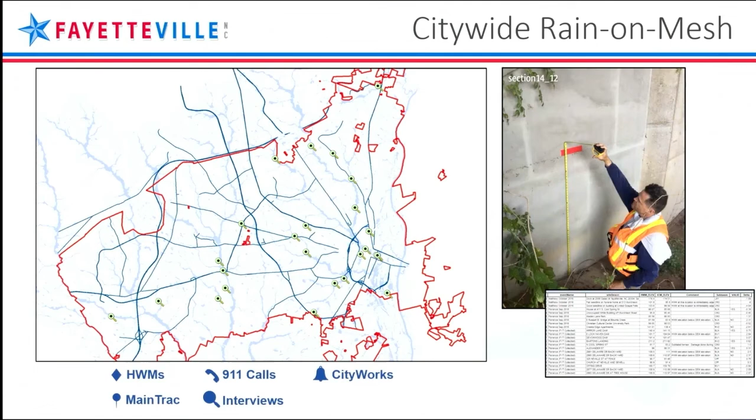There was also anecdotal non-survey flood information available. These included flood emergency 911 calls, work order system data that included CityWorks and MainTrac, and then city staff, emergency responder, and NCDOT interview information. This anecdotal information totaled over 175 points citywide. Over 89% of those 175 flood points were validated by the modeling.

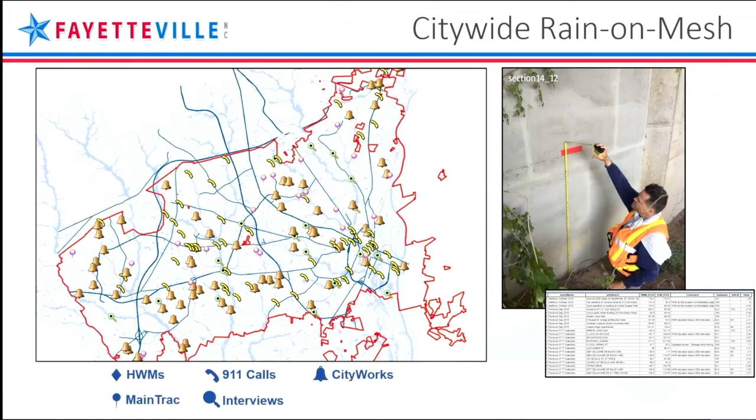Another parallel program effort was a citywide hydrologic analysis. Once we got the model validated, we felt pretty comfortable with it. We wanted a way to use that information to say, okay, we realize all this flood risk across the city. How can we organize it to say, these are the areas that we need to study most importantly? So there was a citywide hydrologic analysis that had the city broken down into subbasins. And that gave us the granularity we needed to focus in on these areas. These subbasins average about 80 acres in size at a citywide scale.

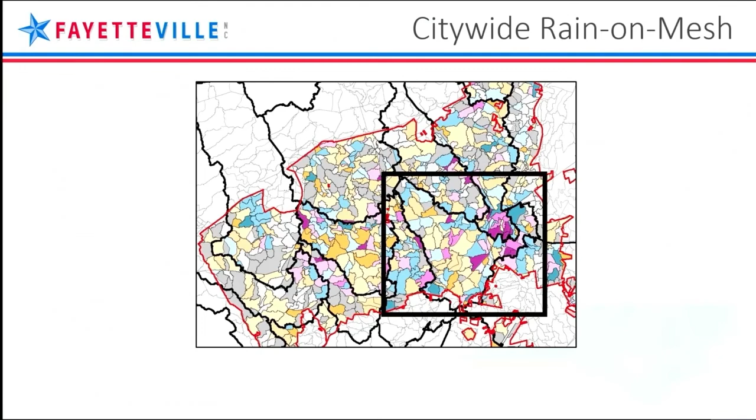So the results from the citywide ROM model were used to identify flooded buildings and road crossings in the 10, 25, and 100-year flood events. Those are noted by these features on the maps. The triangles, I believe, are road crossings, and the smaller dots are structures, buildings, and that kind of thing. So you can see the color-coded. The red means that it was overtopped or impacted by a 10-year storm. The orange means that it was impacted by a 25-year storm, and the yellow means it was impacted by a 100-year storm.

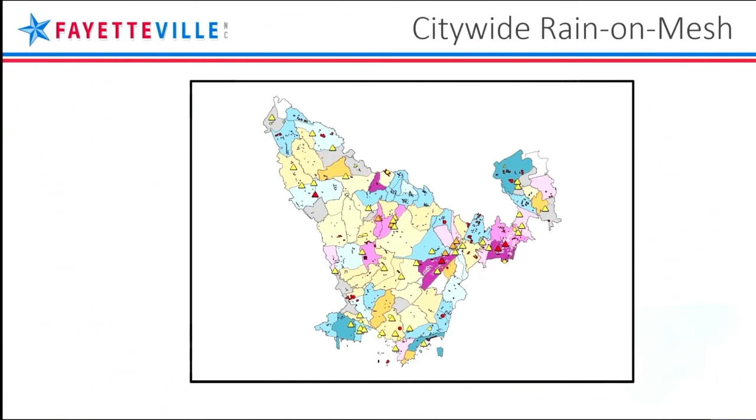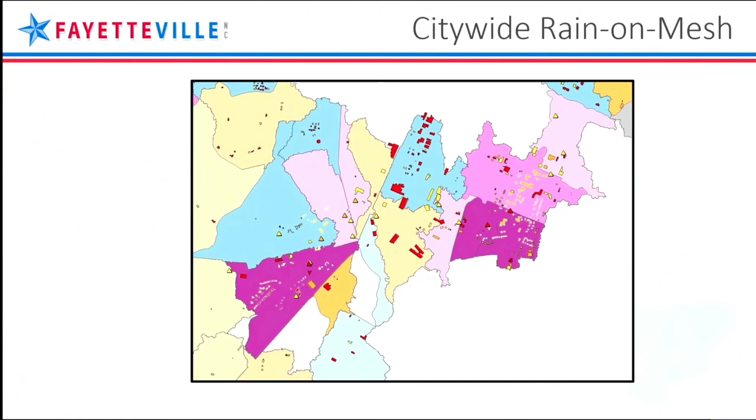These flood impacts in the subbasins were scored, totaled, and ranked to objectively prioritize each of these subbasins for more detailed study. The hotter the color, the purples and the pinks are the higher scoring subbasins, and the tans and grays are the lower scoring subbasins based on flood risk. So now we're comfortable with how the ROM model has produced prioritized subbasins across the city, we've scored those and we're ready to move forward with some watersheds. We've discovered some other benefits the model could provide.

Major event flood forecasting, emergency forecasting. The model can digest and run forecasted rainfall to identify the most at-risk locations in advance of the storm. This could help with staging emergency response resources and/or road closures. Data for management and development purposes. This tool provides analytical flood information citywide, both upstream and downstream of potential new development. This can provide a good understanding of constraints prior to development, rather than discovering issues towards the end of the project.

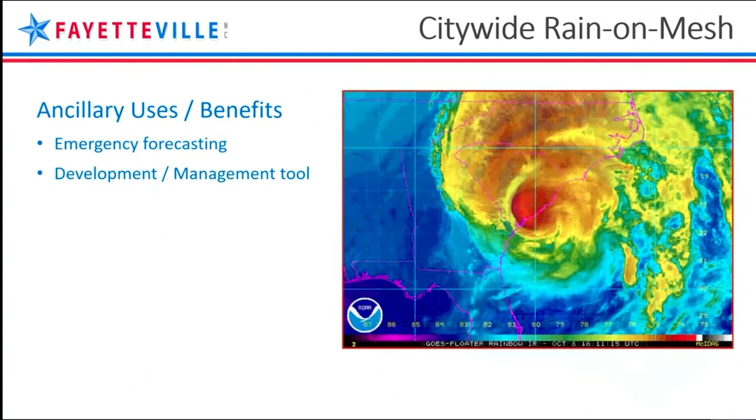And city staff can also use the results of this citywide model where detailed studies are not planned or not available. And they can use it to help inform the day-to-day flood management issues throughout the city. It can also be useful when interfacing with citizens who bring drainage complaints. These can be verified without having to engage in a separate study that could deliver unnecessarily precise results. So those are some additional uses and benefits of the model.

Finally, before we turn it back over to Alicia, we wanted to mention that the citywide ROM model is a one-stop shop to identify, validate, and prioritize flood-prone urban areas at a citywide scale. The analysis was comprehensive.

It took in the whole city, and it resulted in about 21% of the city area being identified as a priority flood area and designated for additional study. These areas will be studied in more detail to specify the flood issue and develop potential project solutions.

The analysis was efficient. The total cost for this analysis was less than 6% of the overall program study budget. And the model identified significant areas that did not need additional study, saving the city an estimated 5 times the overall program study budget in future study costs.

And we feel that the modeling was objective and defendable. We did not have to rely on the anecdotal flood reports alone. It provided tangible definition of flood risk citywide. And this, in turn, allowed the program to move forward confidently and informed to perform more detailed analysis citywide.

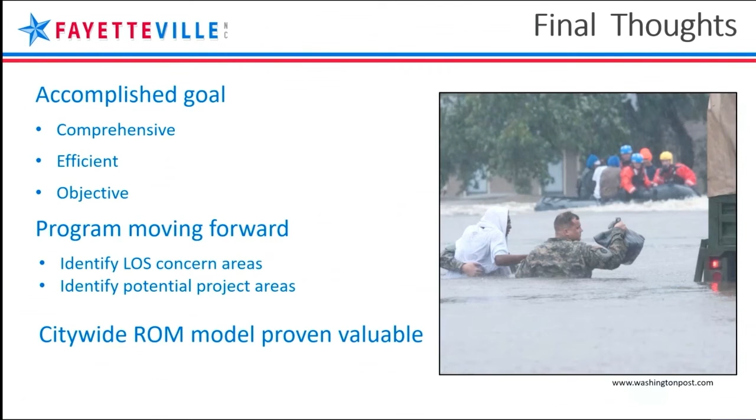With that, I'll turn it over to Alicia to wrap us up. Thank you. Thanks for all that information, Ed.

From there, we're using the ranking of severity of the concern areas, truly what the problem is, how bad it is and what type it is, to decide whether or not to move forward with potential projects. For severity, we're using lengths of lane impacted, hazardous crossings, the depth and velocity, number and type of structures impacted, including essential facilities and access concerns. And we're also looking at impacts to streams.

So what are we doing? In a nutshell, the city is reviewing the concern areas with the team. Then with our combination of institutional knowledge and the modeling results, we help determine whether or not to move forward with evaluating potential projects.